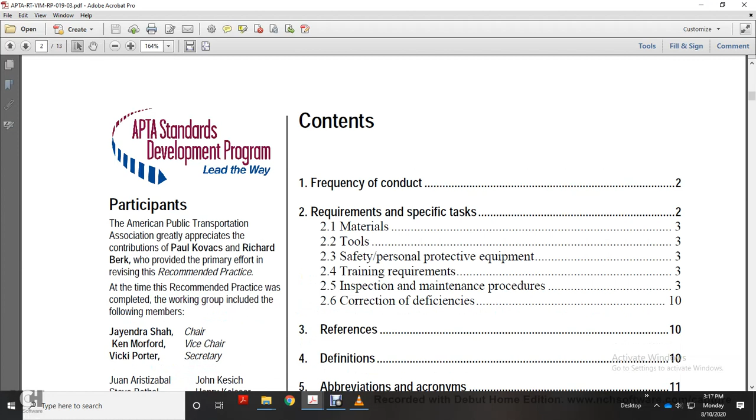This is the American Public Transportation Association (APTA) standard development practice, a recommended practice for truck system periodic inspection and maintenance. It covers frequency of conduct, requirements, specific tasks, materials, tools, safety/personal protective equipment, training requirements, inspection and maintenance procedures, and correction of deficiencies.

The introduction is not part of it. Now, truck system periodic inspection maintenance.

The frequency of conducting periodic inspection and maintenance tasks of the truck system shall be performed on a regular schedule determined by the rail transit system. The frequency of tasks contained within the recommended practice should comply with all applicable federal, state, and local regulations, and further conduct with the rail transit system's periodic inspection maintenance program.

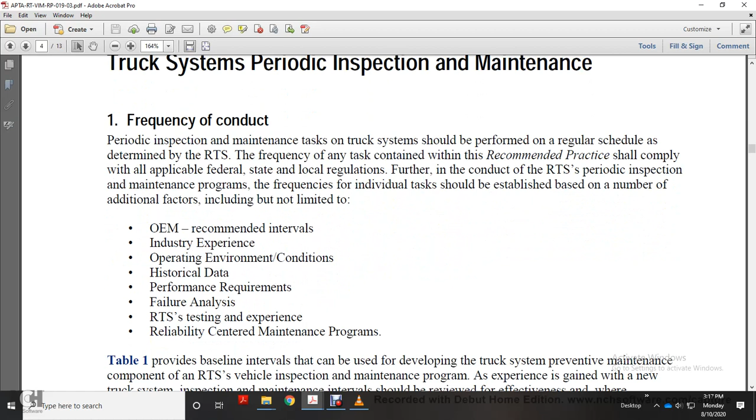Frequency of individual tasks shall be established based on a number of additional factors, including but not limited to the original equipment manufacturer recommended intervals, industry experience, operating environmental conditions and historical data, performance requirements, failure analysis, rail transit system testing, and experience with reliability centered maintenance programs.

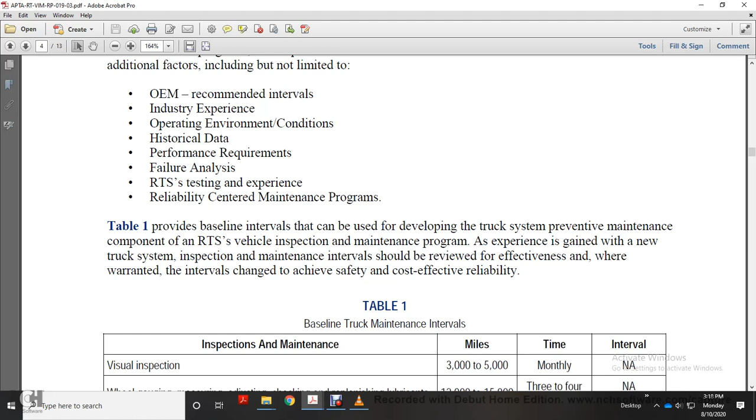Table 1 provides a baseline interval that can be used for developing truck system preventive maintenance for components of the rail transit system vehicle inspection maintenance program. As experience is gained with the truck system, inspection and maintenance intervals should be reviewed for effectiveness, where warranted, intervals changed to achieve safety and cost-effective reliability.

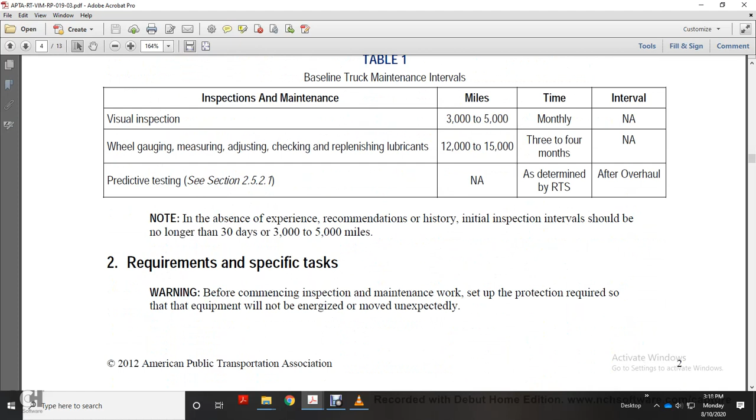Section 2: Requirements and specific tasks. Before commencement of inspection maintenance work, set up proper protection to ensure equipment will not be energized or moved unexpectedly. Warning: after completing the truck inspection or repair verify that truck brake cutout devices are returned to normal operating position.

If brake cutout devices are left in the cutout position, tag out the cutout device and follow the rail transit system operating procedure for moving the vehicle without brakes, or with brakes cut out. Section 2-1: Material.

The following materials are normally required for truck inspection: mainly approved lubricants and colloidal copper compounds. Refer to the original equipment manufacturer maintenance manual for additional materials or service bulletins or rail transit system instructions.

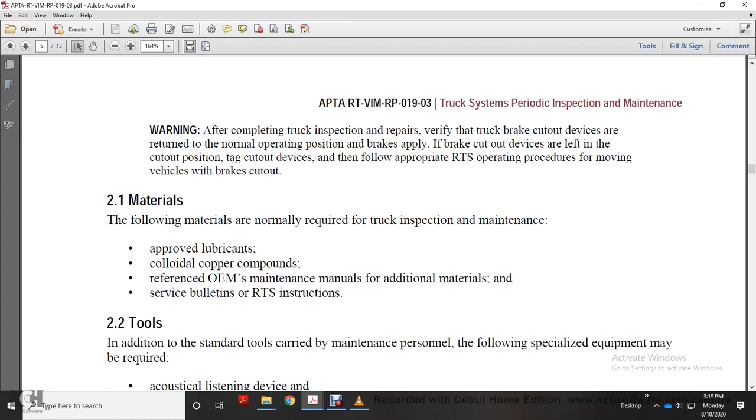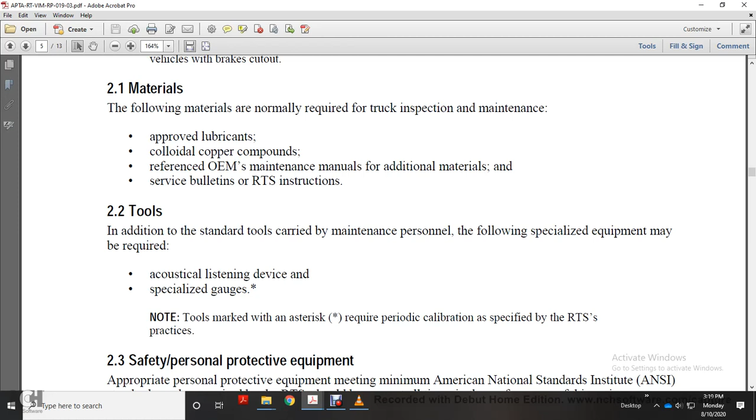In addition to the standard tools carried by maintenance personnel, the following specialized equipment may be required: acoustical listening devices and specialized gauges. Note that tools marked with an asterisk require periodic calibration for the rail transit system.

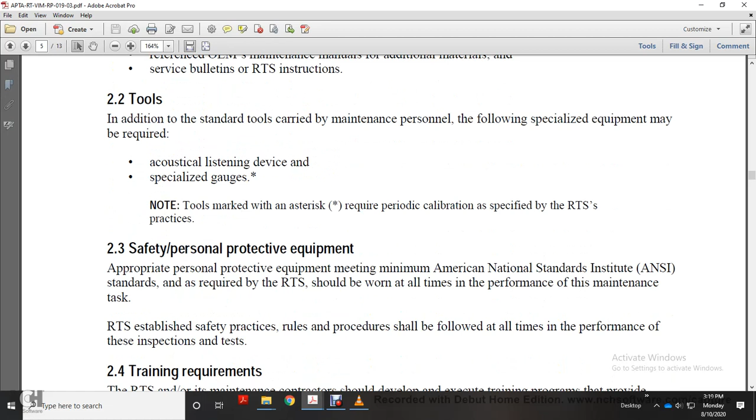Section 2-3: Safety personnel protective equipment. Appropriate personal protective equipment meeting American National Standards Institute standards is required and shall be worn at all times performing the maintenance task. The rail transit system's established safety practice rules and procedures should be followed at all times during performance of these inspections and tests.

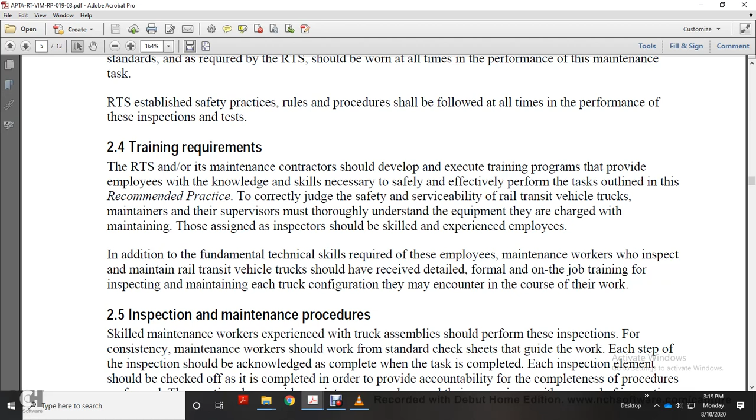Additional fundamental technical skills are required for employees and maintenance workers who inspect and maintain rail transit trucks. They should receive formal and on-the-job training for inspecting and maintaining each truck configuration encountered in the course of their work.

Section 2-5: Inspection maintenance procedure. Skilled maintenance workers experienced with truck assembly shall perform the inspection. Consistency of the maintenance work shall be maintained with a check sheet that guides the work; each step of the inspection should be acknowledged to confirm the task is in fact completed.

Each inspection element should be checked off as completed in order to provide accountability for the completeness of the procedure performed. This practice also provides maintenance workers and supervisors with required inspection progress communication between shifts.

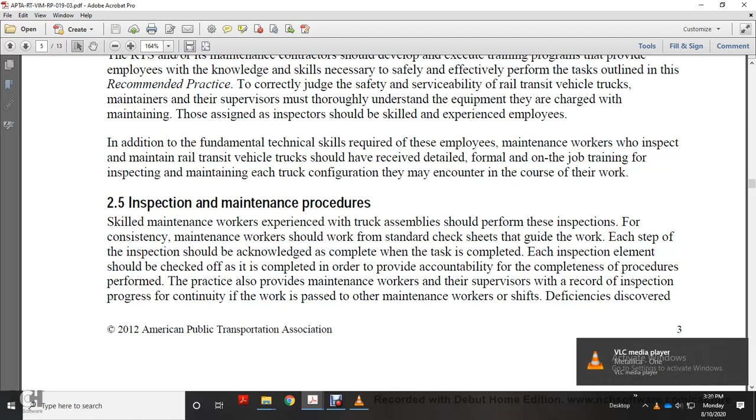Deficiencies discovered during the inspection should be recorded on the inspection check sheet, and inspection documents shall be signed by the inspector completing the inspection.

Any repair or adjustment completed during the inspection should be recorded on the inspection forms and signed off as complete. When maintenance work performed on deficiencies is not acknowledged as corrective on the inspection forms, the disposition of incomplete items should be noted on the inspection forms as re-inspected, found serviceable, or converted to a work order number.

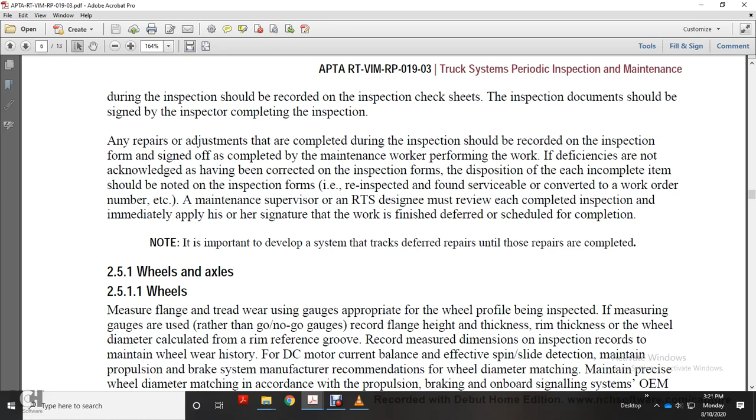A maintenance supervisor or rail transit system designee must review each completed and inspected item promptly, applying his or her signature to ensure the work is finished or deferred with a schedule for completion. It is important to develop a system for tracking deferred repairs until the repairs are completed.

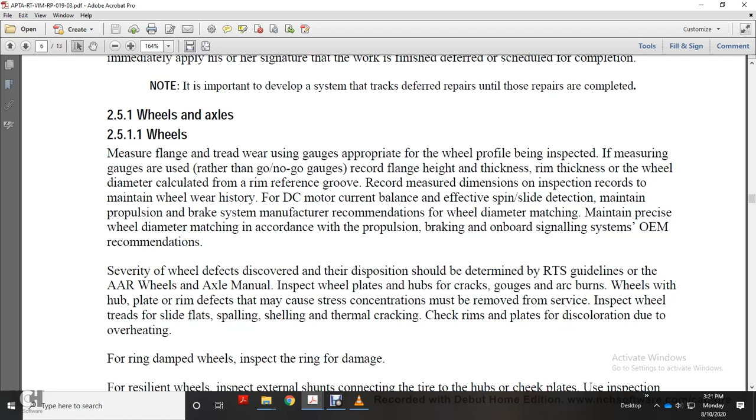Maintain precise wheel diameter matching in accordance with the propulsion, braking, and onboard signaling system original equipment manufacturer recommendations.

The severity of a discovered wheel defect and its disposition should be determined using the rail transit system guideline and the AAR Wheel and Axle Manual. Inspect the wheel plate and hub for cracks, and check for arc burns. Wheel hub, plate, and rim defects that may cause stress concentration must be removed from service.

Inspect the wheel tread for slide flats, spalling, shelling, and thermal cracking. Check the rim and plate for discoloration due to overheating.

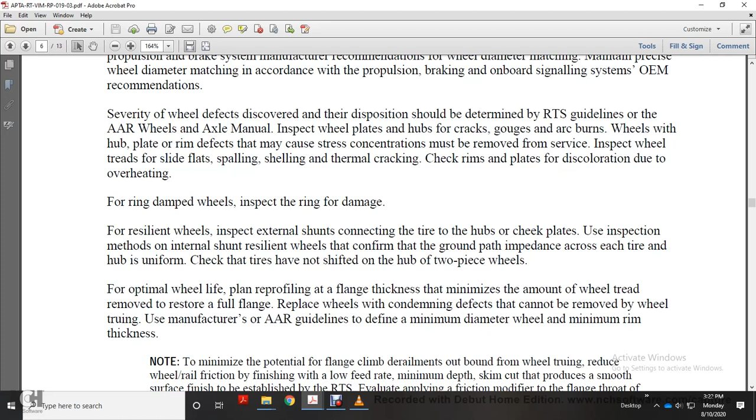For resilient wheels, inspect for ring damage and inspect the external shunt connecting the tire to the hub, and check the plate as part of the inspection method.

For internal shunt resilient wheels, the ground path is formed by checking the impedance across each tire to the hub, and checking uniformly that tires have not shifted on the hub.

Two-piece wheels: achieve optimum wheel life through profiling. Minimize flange thickness loss and the amount of wheel tread removed during profiling to preserve full flange.

For wheels with condemning defects that cannot be removed by wheel truing, use the manufacturer's or AAR guidelines to define the minimum diameter for the wheel and rim thickness.

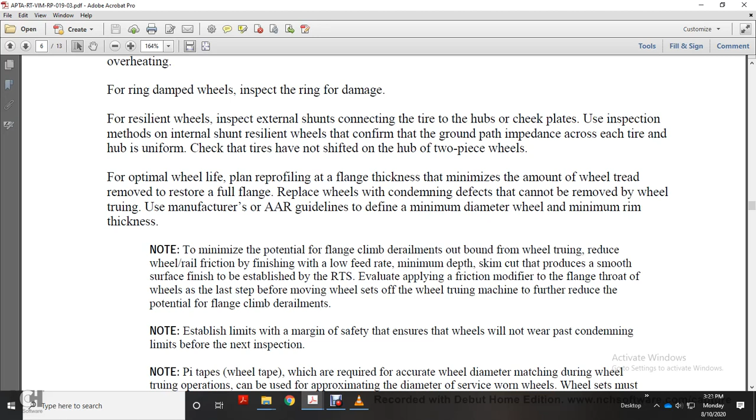Evaluate applying a friction modifier to the flange throat over the wheel as a last step. Move the wheel with the wheel truing machine to further reduce the potential for flange climb or derailment.

Establish limits with a margin of safety to ensure the wheels will not wear past the condemning limit before the next inspection.

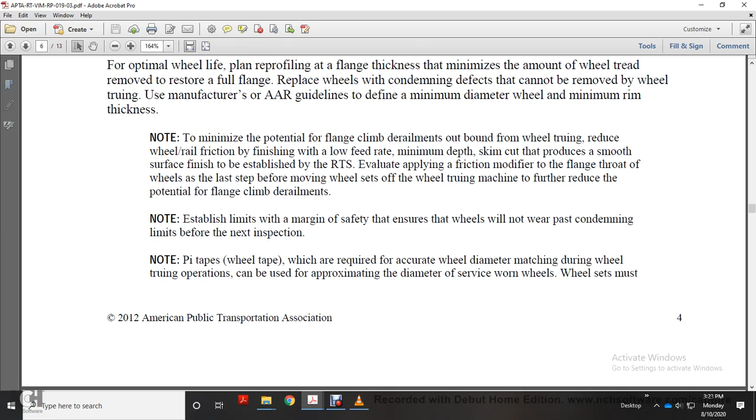The Pi tape is wrapped around the entire wheel tread so that it stands off, located with the tape on the tread gauge point.

Axles: disposition of axle defects is determined using the rail transit system guideline and the AAR Wheel and Axle Manual. Visually inspect axles for grooves, nicks, and arc burns.

Remove indications of gouging by removing axle nicks, gouges, arc burns, and circumferential scoring that may become stress concentration points, as part of axle repair.

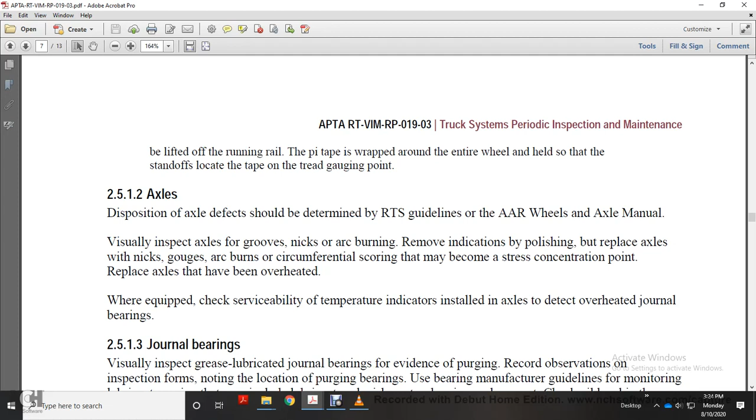Replace axles if they have been overheated. Where equipped, check serviceability of temperature indicators installed on axles to detect overheated journal bearings.

Journal bearings: visually inspect grease-lubricated journal bearings for evidence of purging. Record observations on the inspection form.

Note the location of purging bearings, using the bearing manufacturer's guidelines for monitoring lubricant purging, which may include lubricant replenishment or bearing replacement.

Check the oil level in the reservoir for oil-lubricated journal bearings.

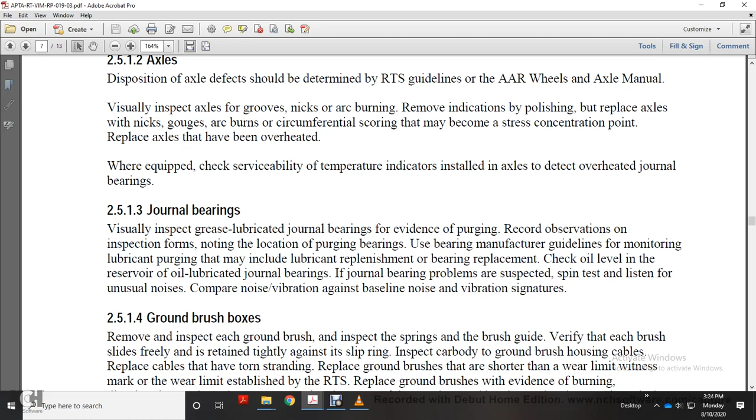If a journal bearing problem is suspected, conduct a spin test listening for unusual noise, comparing comprehensive noise and vibration against baseline vibration signatures. Ground brush boxes.

Remove and inspect each ground brush, and inspect the spring and brush guide, verifying that each brush slides freely and is retained tightly against the slip ring.

Inspect the car body-to-ground brush housing cables, replacing cables that have been torn or stranded, and replace ground brushes that are shorter than the wear limit.

Note the wear limit marks per the rail transit system standards, and replace ground brushes showing evidence of burning.

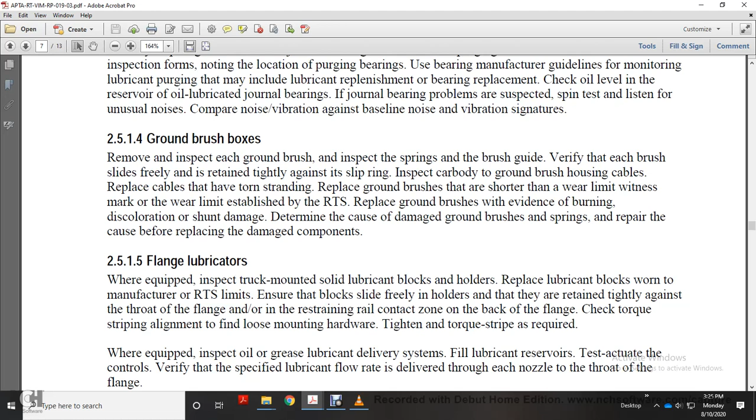Check discoloration to determine the cause of damage, and inspect ground brush springs for repair, replacing any damaged components.

2515 flange lubricators. Where equipped, inspect the truck-mounted solid lubricant blocks and holders replaced as needed. The manufacturer and rail transit system should ensure the block slides freely into the holders and is retained tightly against the throat of the flange or in the restraining rail contact zone on the back of the flange, checking torque and alignment.

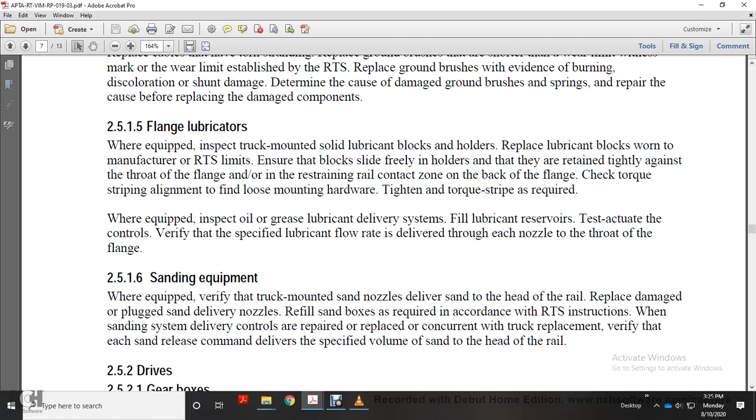If loose mounting hardware is found, tighten to the required torque and inspect for wear. Where equipped, inspect the oil or grease lubricant delivery system and fill the lubricant reservoir. Test and actuate the control to verify the specified lubricant flow rate.

2516 sanding equipment. Where equipped, verify the truck mount sand nozzle delivers sand to the head of the rail, and replace any damaged delivery nozzle plugs. Refill the sand box as required per the rail transit system instructions, and repair the sanding system delivery control as needed.

This should be done concurrent with truck replacement. Verify that each sand release command delivers the specified volume of sand to the head of the rail. Section 2.5.2, drives and gearboxes.

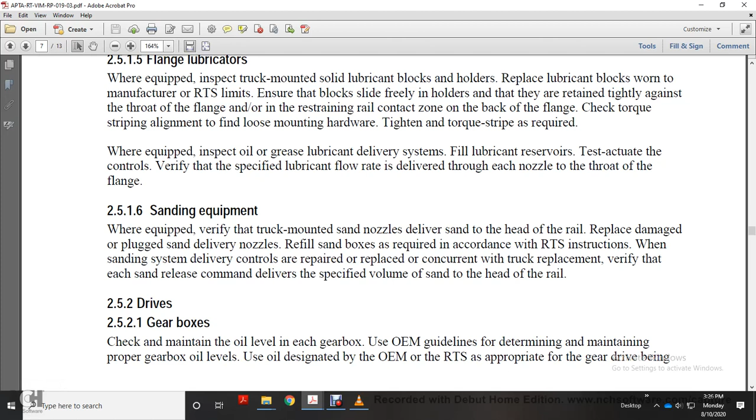Check and maintain the oil level of each gearbox. Follow original equipment manufacturer guidelines to determine and maintain proper gearbox oil levels, using oil designated by the original equipment manufacturer or the rail transit system as appropriate for the drive gear.

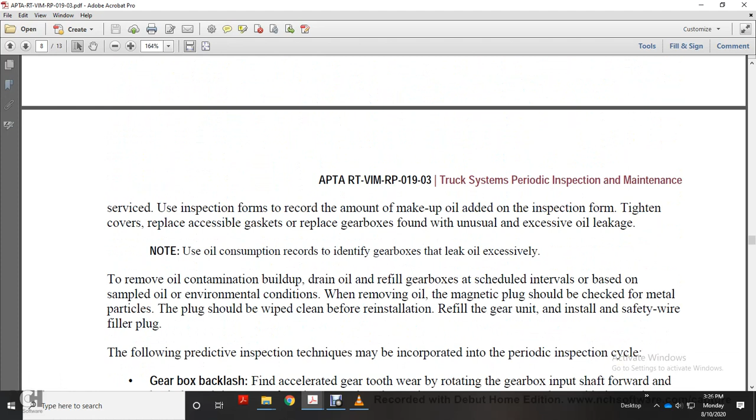When servicing, record the amount of makeup oil added on the inspection form. Tighten covers and replace gaskets as accessible, and replace the gearbox if there is unusual or excessive oil leakage. Note: use oil consumption records to identify gearboxes leaking oil excessively.

To remove oil contamination buildup, drain and refill the gearbox at scheduled intervals based on sampled oil and environmental conditions.

When removing oil, the magnetic plug should be checked for metal particles, and the plug should be wiped clean before installation and refill of the gear unit. Install a safety-wire filler plug.

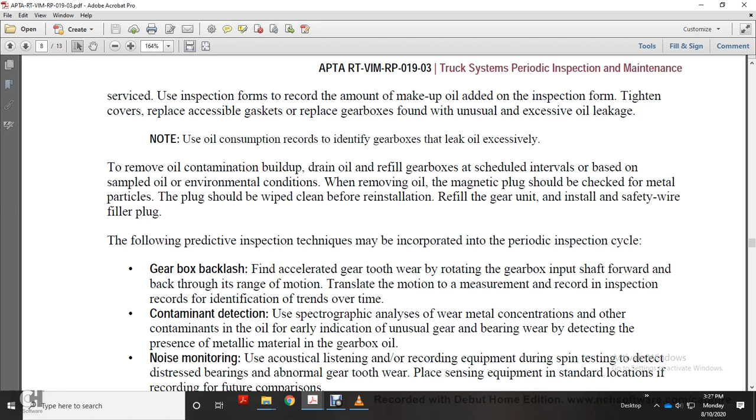The following predictive inspection techniques may be incorporated into the periodic inspection cycle. Gearbox backlash.

Find accelerated gear tooth wear while rotating the gearbox input forward and backward through the range of motion, and translate the motion into measurement. Record the inspection and identify trends over time.

Contaminant detection: use spectrographic analysis, where metal concentration in the contaminated oil indicates unusual gear or bearing wear, to detect the presence of metallic material in gearbox oil.

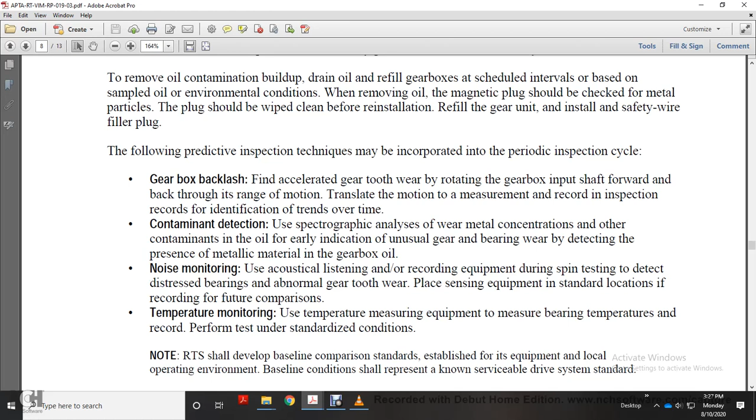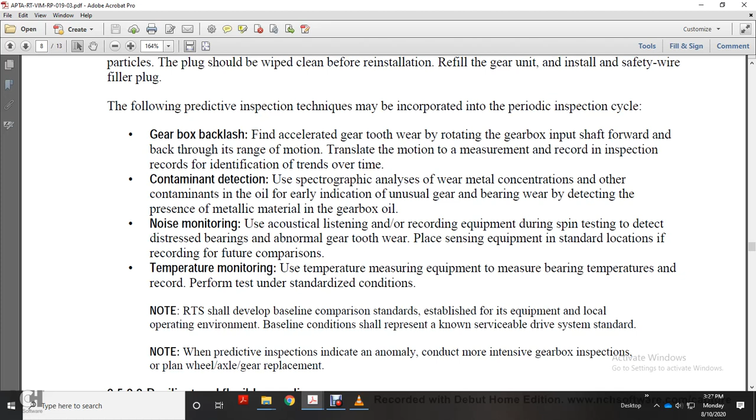Noise monitoring: use acoustic listening and recording equipment during spin testing to detect distressed bearings or abnormal gear tooth wear, placing sensing equipment at standard locations for recording and future comparisons.

Temperature monitoring: use temperature measuring equipment to measure bearing temperature and record it, performing the test under standardized conditions.

Note: rail transit systems should develop a baseline for comparison, standardized for staff, equipment, and local operating environment. The baseline condition should be representative of a known serviceable drive system standard. Note that if predictive inspection indicates an anomaly, conduct a more intensive gearbox inspection for possible wheel, axle, and gear replacement.

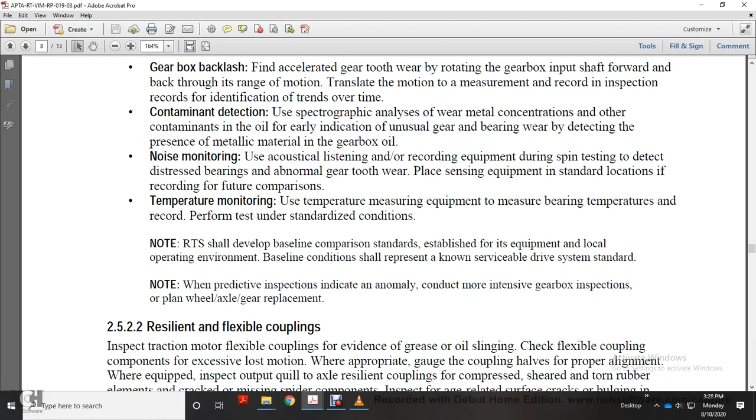2.5.2.2, resilient flexible coupling, traction motor. For the flexible coupling, check for evidence of grease and oil slinging, and check the flexible coupling components for excess lost motion, appropriate gauging of the coupling half, and proper alignment. Where equipped, inspect the output quill or axle resilient coupling for compressed shear.

Check for torn rubber elements, cracked and missing spider components, and inspect for age-related surface cracking, bulging, and elastomer coupling elements, which are indications of loss of resiliency. Lubricate and secure fittings adhering to original equipment manufacturer and railway transit system guidelines, and remove and replace defective couplings.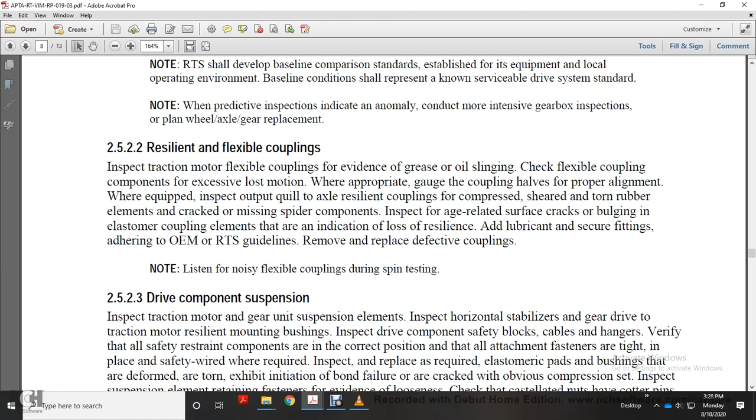Note: listen for noisy flexible coupling during spin tests. 2523, drive component suspension.

Inspect the traction motor and gear unit suspension elements. Inspect horizontal stabilizer gear drive and traction motor resilient mounting bushings. Inspect drive component safety blocks, cables, and hangers.

Verify that safety restraint components are in the correct position, that all attachment fasteners are tight, and place safety wire where required.

Inspect and replace as required elastomeric pads and bushings that are deformed and torn, exhibiting bond failure, cracking, or obvious compression set.

Inspect the suspension elements and retaining fasteners for evidence of loosening. Check that castellated nuts have cotter pins properly installed per the fastener provisions, that safety wire is properly wired and retained, and mark and monitor torque stripes for all safety-critical fasteners.

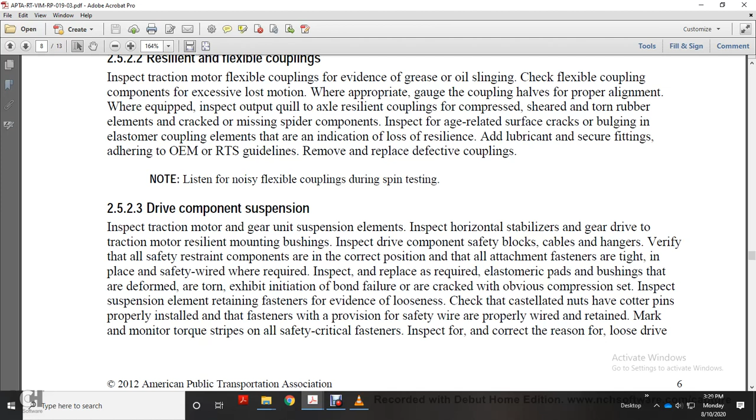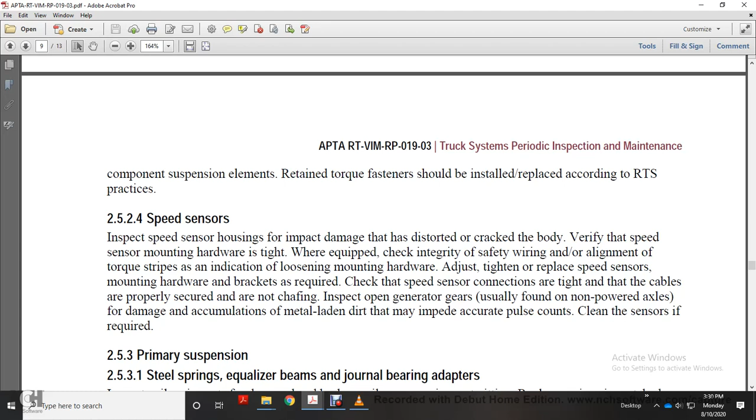Inspect open generator gears, usually found on non-powered axles, for damage, metal buildup, or dirt accumulation that may impede accuracy. Clean the sensors if required.

253 primary suspension covers steel springs, equalizer beams, and journal bearing adapters. Inspect coil spring settings for damaged or broken coils, excessive rust.

Replace damaged components, and evaluate overall truck condition wheel size before spot replacement. However, for journal box, spring, equalizer beam, spring seat, or bearing adapter issues, a complete truck replacement at the back shop overhaul may be more time and cost effective.

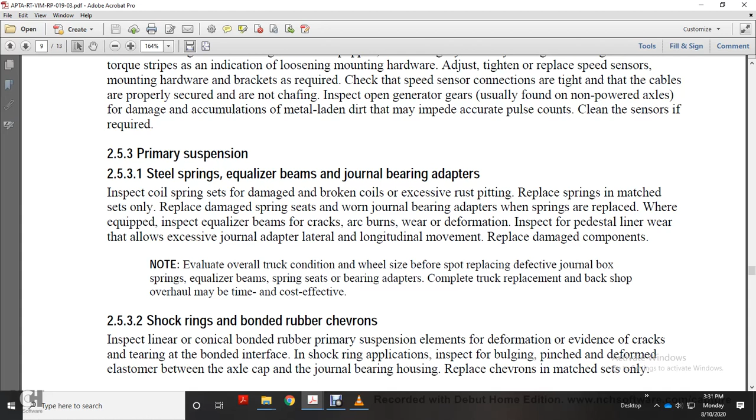Section 2532 covers shock rings and bonded rubber chevrons. Inspect the bonded rubber primary suspension element for deformation and evidence of cracking. Check the bond interface at the shock ring application, and inspect for bulging, pinching, and deformed elastomer.

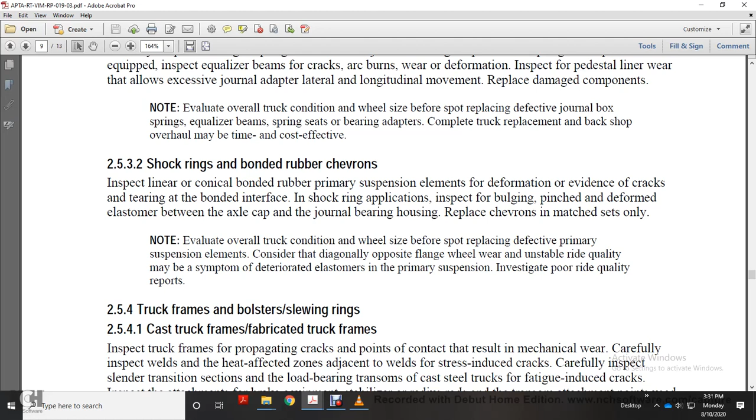Check between the axle cap and the journal bearing housing. Replace chevrons only as a matched set. Evaluate overall truck condition wheel size before spot replacing a defective primary suspension element. Consider the diagonally opposite flange wheel wear and unstable ride quality may indicate a deteriorated primary suspension system. Investigate any poor ride quality reports.

254 covers truck frames, bolsters, and slewing rings, including cast truck frames and fabricated truck frames. Inspect truck frames at points of contact resulting in mechanical wear. Carefully inspect welds and heat affected zones adjacent to welds for stress-induced cracks.

Carefully inspect slender transition sections and load bearing transoms of cast steel trucks for fatigue induced cracks. Inspect the attachment of brake equipment, and stabilizer or radius rods and transom attachment points used for articulated side frame arrangements. Inspect and lubricate transom spherical bearings where equipped.

Caution: follow original equipment manufacturer recommendations regarding welding, drilling, and application of heat to truck frames. Heat-treated frames have a high propensity to crack or fail as a result of inappropriate repairs.

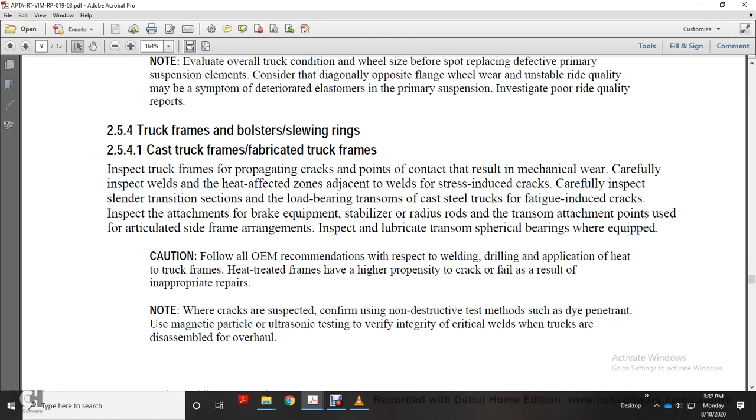Note: where cracks are suspected, use non-destructive test methods such as UV dye penetrant, magnetic particle, or ultrasonic testing to verify the integrity of critical welds and trucks during disassembly and overhaul.

Section 2542 covers truck and car body bolster spring planks. Inspect the bolster spring plank and swing hangers for propagating cracks at points of contact resulting in mechanical wear. Carefully inspect the stabilizer radius rod attachment point and shock absorber attachment bracket for cracks.

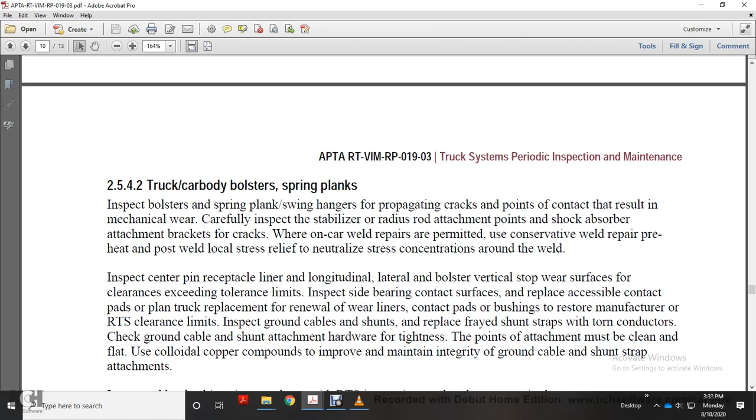Where on-car weld repairs are permitted, use conservative weld repair methods with preheat and post-weld local stress relief to neutralize stress concentration around the weld. Inspect the center pin, receptacle liner, longitudinal and lateral bolster vertical stop wear surfaces for clearance exceeding tolerance limits.

Inspect side bearing contact surfaces and replace accessible contact pads. Plan truck replacement or renewal of wear liners, contact pads, and bushings according to manufacturer or rail transit system clearance limits.

Inspect the ground cable and replace frayed shunt straps with torn conductors. Check the ground cable attachment hardware for tightness, and ensure the attachment point is clean and flat.

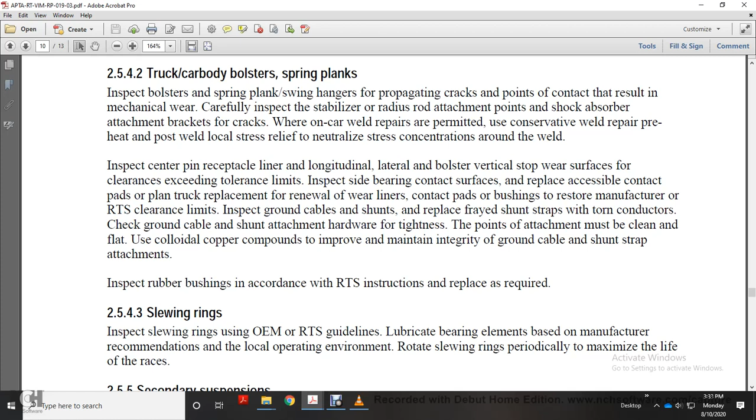Use colloidal copper compounds to maintain integrity at the ground cable and shunt strap attachments. Inspect rubber bushings according to rail transit system instructions, replacing as required.

Section 2543 covers slewing rings. Inspect slewing rings according to original equipment manufacturer and rail transit system guidelines. Lubricate bearing elements based on manufacturer recommendations and local operating environment, and rotate slew rings periodically to maximize race life.

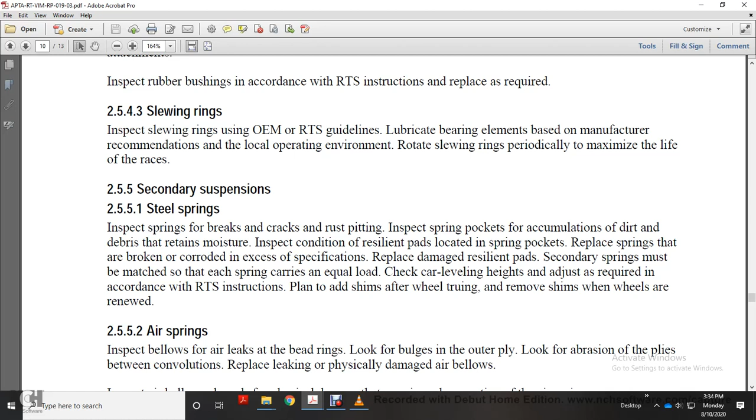Check the car leveling height; adjustment is required in accordance with rail transit system instruction. Plan to add shims after wheel truing and remove the shims when the wheels are renewed.

Section 2552, air springs. Inspect the bellows for air leaks at the bead rings. Look for bulging of the outer ply and abrasion of the ply between the convolutions. Replace air bellows that are leaking or have physical damage. Inspect the air bellows shroud for physical damage that may impede operation of the air spring.

Check that valves admit, lap and release air properly to determine the cause of sluggish or leaking valve operation, and repair before returning the car to service. Check car leveling height, and securely check the adjusting screw for adjustment.

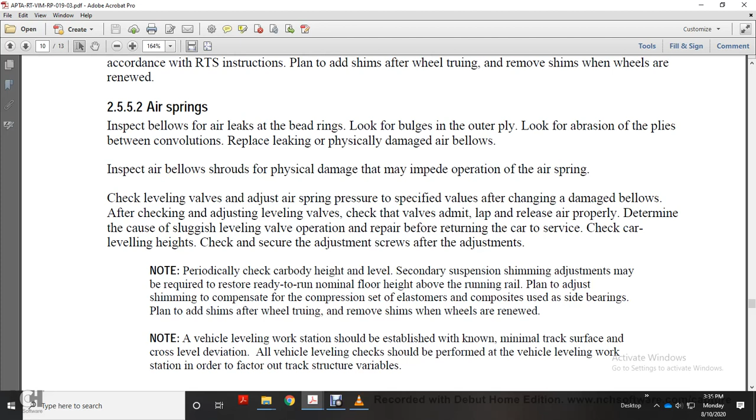Periodically check the car body height level of the secondary suspension; shim adjustment may be required to restore the ready-to-run nominal floor height above the running rail. Plan adjusting shims and compensate with the compression set of elastomers and composites used as side bearings. Plan to add shims after wheel truing and remove shims when wheels are renewed.

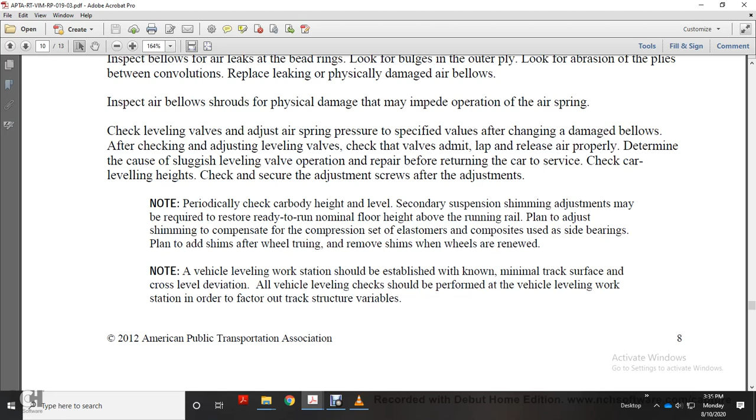A vehicle leveling workstation should be established with known, minimal track surface cross-level deviation. Vehicle level checks are to be performed in order to factor the track structure variables.

Section 2553, torsion rod. Inspect torsion rod bushing for cracks and other signs of wear. Inspect mounting hardware, securing and lubricating the plate per rail transit system instructions.

Section 256, truck-to-car body connection. Radius rods: inspect radius rod resilient pads at the truck bolster anchor and car body anchor. Inspect the radius rod securing hardware.

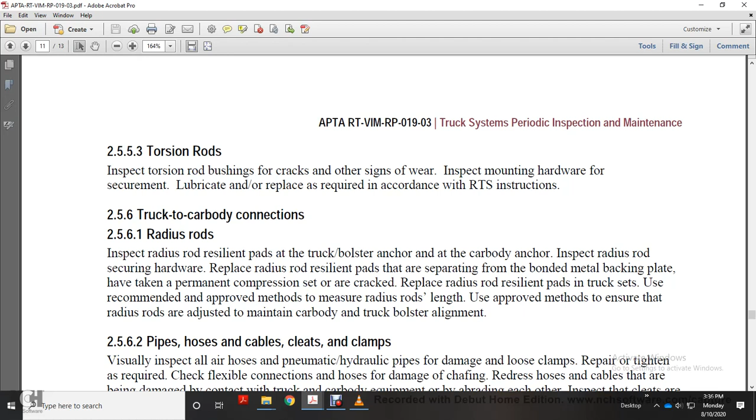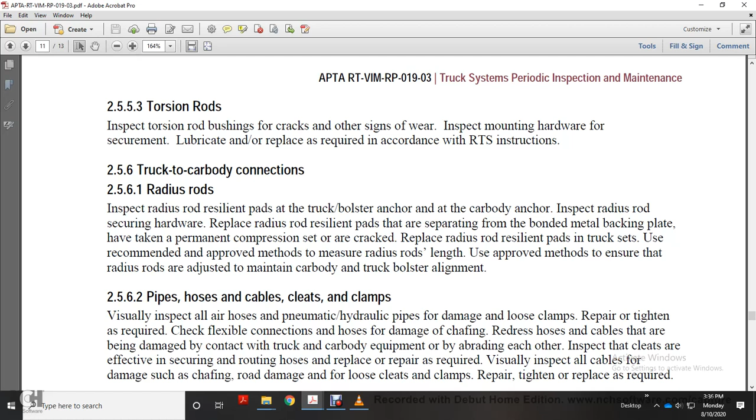Replace radius rod resilient pads that are separating from the metal backing plate or have a permanent compression set or are cracked. Replace radius rod resilient pads in truck sets, use the recommended approved method to measure rod length, and use the approved method to ensure radius rods are adjusted to maintain car body-to-truck bolster alignment.

Section 2562, pipes, hoses, cables, cleats and clamps. Visually inspect all air hoses, and pneumatic and hydraulic pipes for damage or loose clamps; repair or tighten as required. Check flexible connections for hose damage or chafing.

Redress hoses and cables if they are being damaged from contact with the truck or car body equipment, or from chafing against each other. Inspect cleats for ineffectiveness in securing the routing of hoses; repair or replace as required. Visually inspect all cables for damage or chafing. Repair, tighten, or replace damaged or loose cleats and clamps as required.

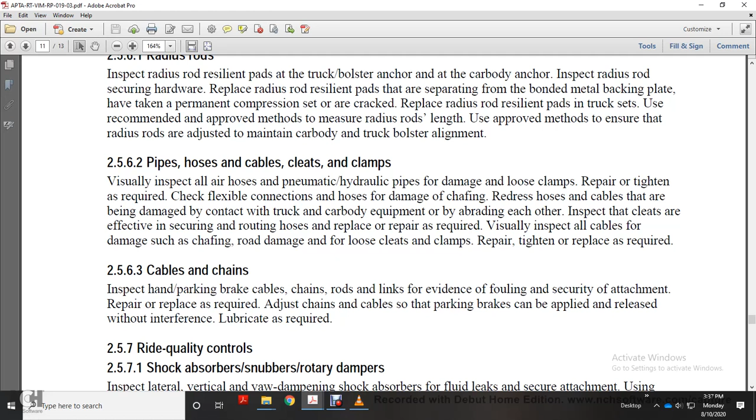Section 2563, cables and chains. Inspect handbrake parking chain, cable, chain rod, and linkage for evidence of fouling or security of attachment; repair or replace as required. Adjust the parking brake cable so it can be applied and released without interference. Lubricate as required.

Section 257, shock absorbers, also known as rotary dampers. Inspect the lateral, vertical, and yawing damping shock absorbers for fluid leaks and security of attachment, per original equipment and rail transit system guidelines.

Replace leaking shock absorbers; check the shock absorber and mounting hardware for tightness. Determine and remedy the cause of a broken shock absorber or loose mounting hardware, then replace damaged components.

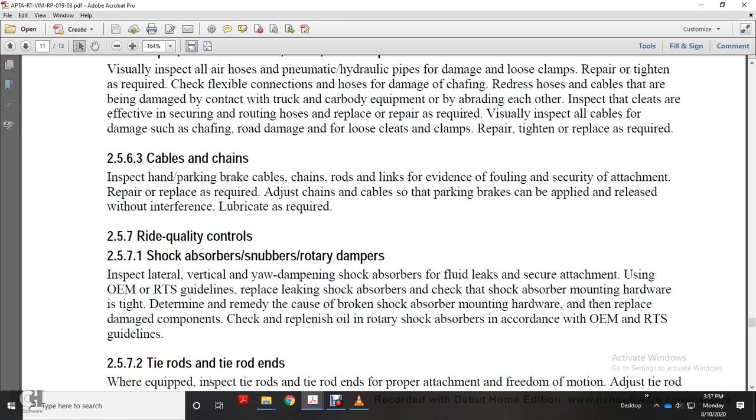Check and replenish oil in the rotary shock absorber to conform with original equipment and rail transit system guidelines.

Section 257-2, tie rods and tie rod ends. When equipped with tie rods and tie rod ends, ensure proper attachment and freedom of motion. Adjust the tie rod length to allow the full range of motion required for the attached shock absorber. Replace worn or loose tie rods and lubricate tie rod ends per original equipment and rail transit system specifications.

Section 258, miscellaneous truck-mounted equipment, trip cock. Inspect the emergency pipe and trip cock for proper attachment and operation; gauge and adjust as required.

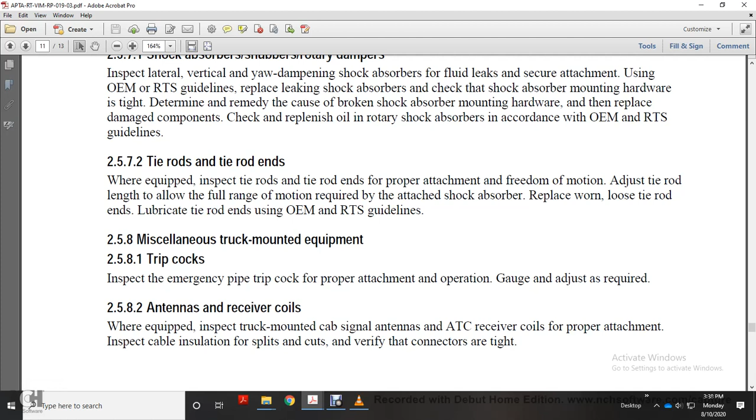Section 2582, antenna and receiver coil, when equipped. Inspect the truck-mounted cab signal antenna and ATC receiver coil for proper attachment, inspect cable insulation for splits and cuts, and verify that the connectors are tight.

Section 2583, general hardware. Inspect all truck-mounted hardware for damage or missing components per rail transit system instructions; repair and replace as needed.

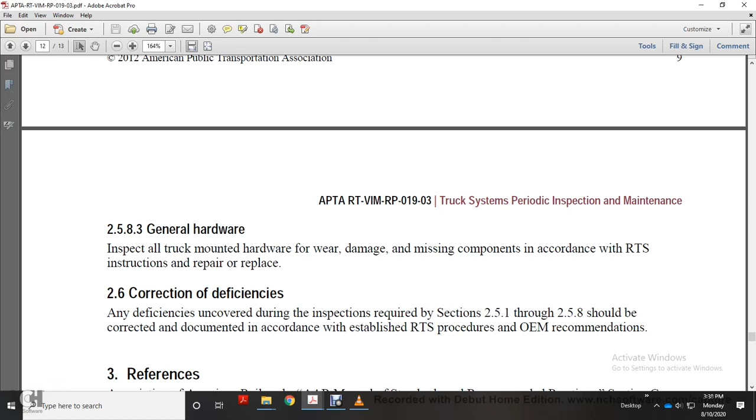Section 26, correct deficiency. Any deficiency uncovered during the inspection sections 251 through 258 should be corrected and documented in accordance with rail transit system procedures and original equipment manufacturer recommendations.

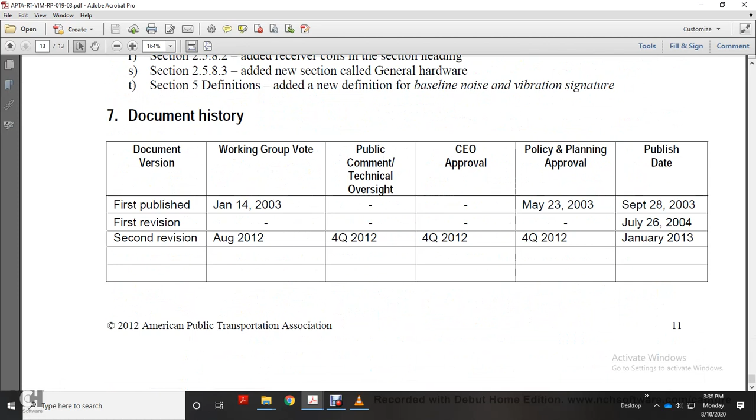Section 3 covers references, definitions, abbreviations, a summary, and change document history. And that concludes your truck system periodic inspection and maintenance overview.